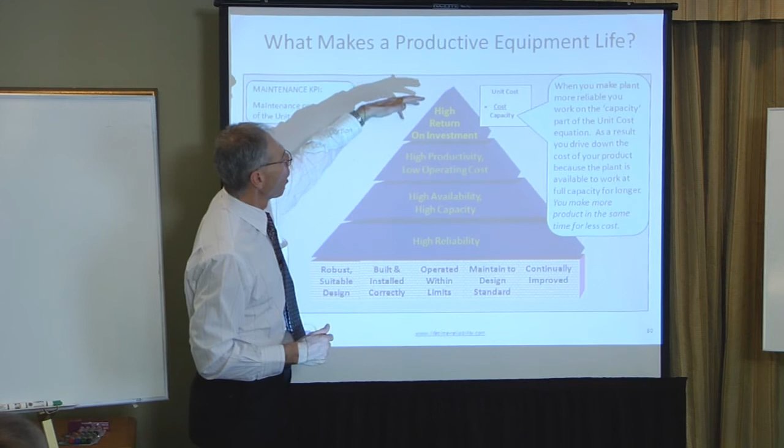And the lower that unit cost is, the more competitive we are in the marketplace. So if high productivity can produce a good capacity at a low cost, then our unit cost is low, and in theory we can sell more into the market because we've got a bigger margin to work with and reduce our price and still be profitable in business.

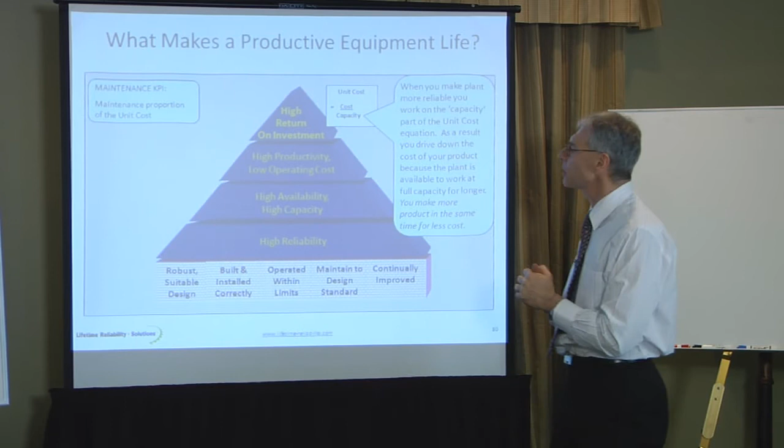But productivity and low cost operation requires some foundational things as well, and they require high plant availability and high capacity. So you want plant that is reliable, that will work at full design rate continuously. If we can achieve that, then we'll minimise our costs and maximise our throughput.

And those two depend upon another factor, which is reliability. If the plant is unreliable, I cannot get availability, nor can I get the full capacity it was designed to deliver. So reliability is, I guess, the holy grail in manufacturing businesses, making sure that we get a high return on investment.

There's a lot of sense in running a business with high reliability as your focus, because it then pays back increased capacity, lower unit cost, and for a lower cost, which then is also a lower unit cost impact. Now, reliability, we know, depends on foundational concepts as well.

The initial design choice is vital. If we get the wrong design choice, to put a racing car out in a paddock full of rocks, that racing car isn't going to make it.

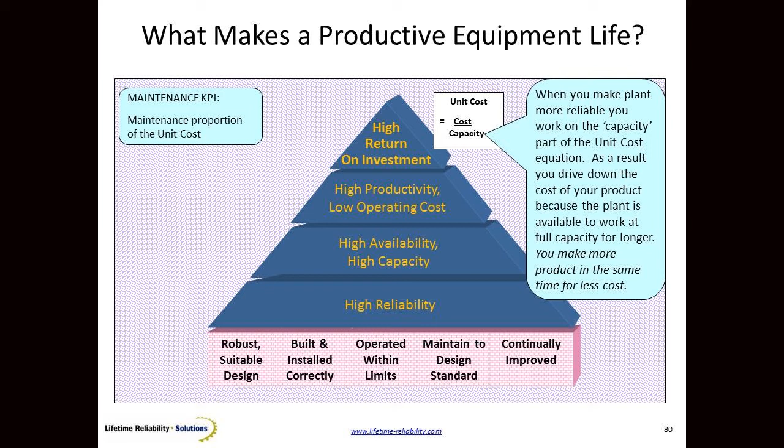Got to operate it within the design envelope. Got to maintain it to the design requirements of the manufacturer, because they have got a limited scope to run that machine in. And what we also know, for improving success in the future, we want to improve our machines and take what we learn about using the machine into a redesign of the machine to make it even more reliable and even more robust.

So reliability depends on these foundational things: the design, installation, operation, maintenance, and the learnings that we take in using that machine into the next variation, the next model, the next design.

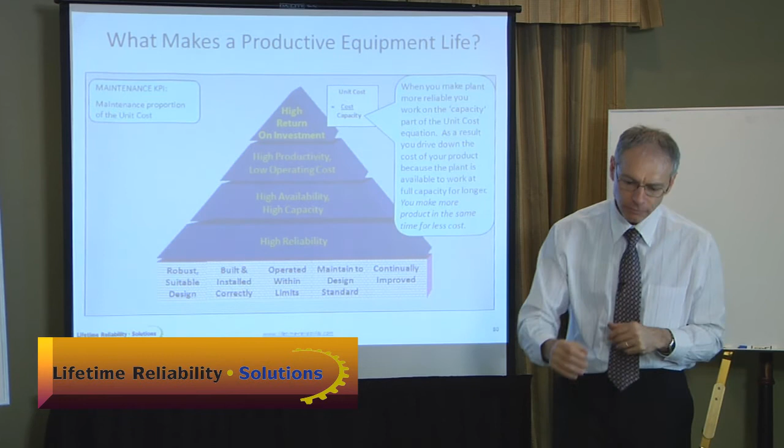The life cycle, I can draw a simple picture of the life cycle. It talks about the beginnings of an idea to create a business. From that idea, we talk about a feasibility. What process are we going to use?

What machines are we going to use? What's it going to cost? How many people are we going to need? How big a footprint is it going to be? We go and model all that on paper, basically. Then somebody will price that feasibility design and come up with a number to invest that will produce the output we expect.

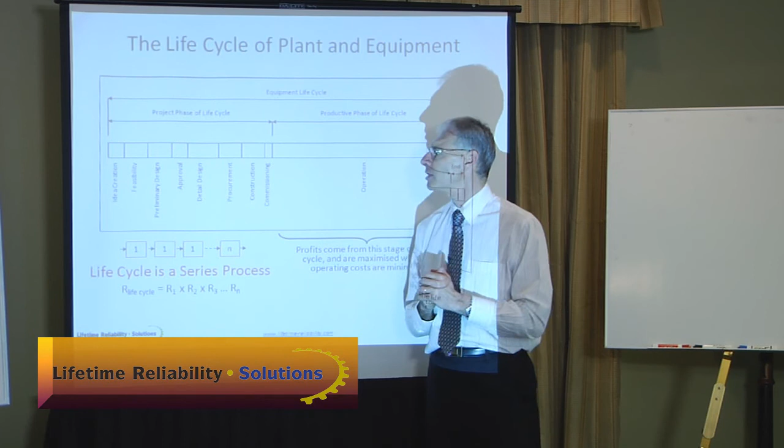We go to the banks, get the approval for the money. Then finally, we go into the complete design process. And for the very first time, we begin to learn all the nitty-gritty, all the details of how to make this thing actually work.